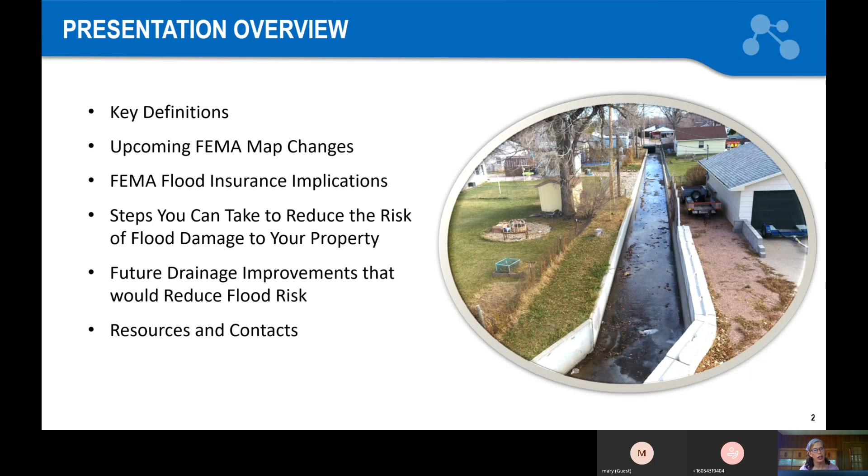I will also go through steps that you can take to reduce the risk of flood damage to your property, regardless of the FEMA map changes and what the status of that is. And then look at, on a city-led process, future drainage improvements that would reduce flood risk throughout this basin. And then finally going through resources and contacts for questions.

So on the key definitions, you've probably heard either in the media or from neighbors, something referred to as the 100-year event or the 500-year event. And sometimes you've heard that, hey, we've gotten three 100-year events in the last 20 years, or we haven't had an event like that in my memory. And when we say something like the 100-year event, what we really mean is it has a 1% chance of happening in any given year.

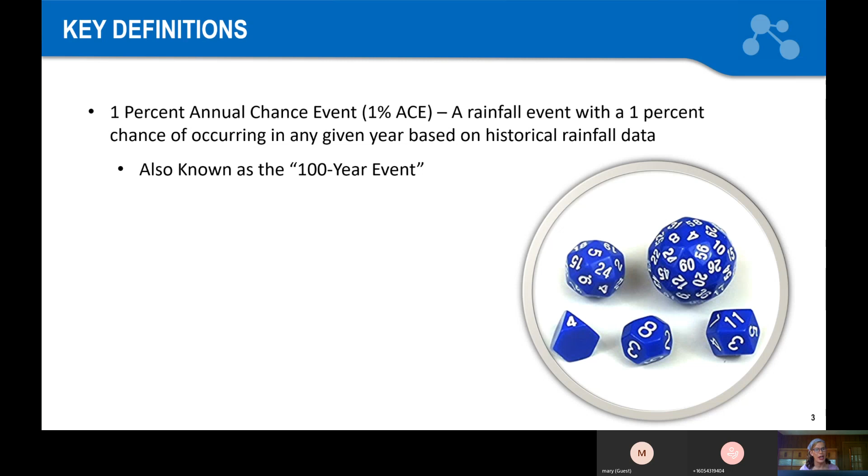The way to think about that is if you think about a large die, and if it had 100 sides on it, and one of those sides was the 100-year event, and once a year you rolled that die, that 100-year event, when it got rolled, would be kind of the way that the statistics work on that. And so you can think about rolling that die maybe 200 times, and you might not get that at all, or you might roll it 3 times in 20 tries. And so that's the background on why sometimes we don't have an event like this for a very, very long time, or we might see that event more frequently than what we might expect.

Getting to a more severe event, we have also what we call the 500-year event, and that is the 0.2% chance of happening. So you take that 100-sided die, you make it a 500-sided die, and put the 500-year event on just one of those sides. And again, the likelihood that you'll get that in any given roll or year is even less, but it can happen. And if you roll it, let's say 50 times, which would represent 50 years, there's a decent chance that you might pull up a 500-year event in a 50-year time frame. So that's what we mean when we talk about the 100-year event, the 500-year event.

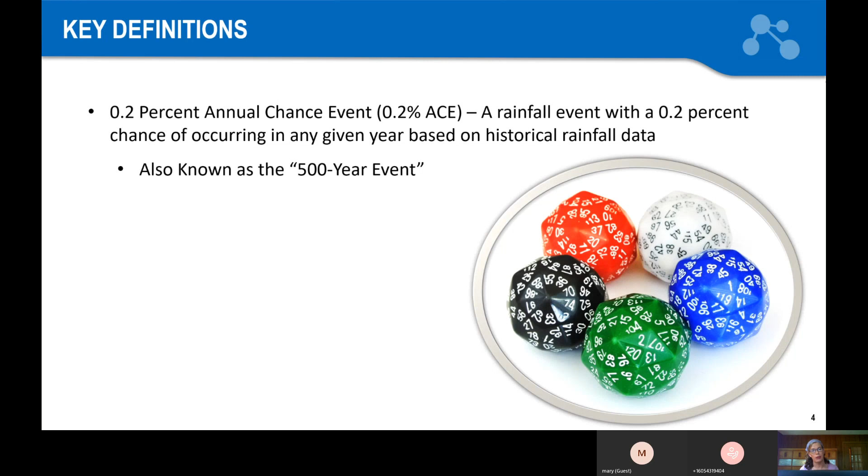In this presentation, I'll also talk about the 10-year, which you take that 100-sided die and put it down to 10 sides. That would represent a 10-year event, and a 50-year event would be a 50-sided die with the 50-year event on that. So when I talk about that, just again, think about the likelihood and the familiarity that you might have with rolling a die, and that you might have a lot of events happening in one try, or you might not get that number in a lot of different tries.

Next definition that I'll talk about is a flood insurance rate map, or FIRM as an abbreviation. And what that is, it's an official map that FEMA issues, and it shows different flood zones. So this darker gray in this particular map is the 100-year event, or that 1% annual chance. And this lighter gray is the 500-year event, or the 0.2% annual chance.

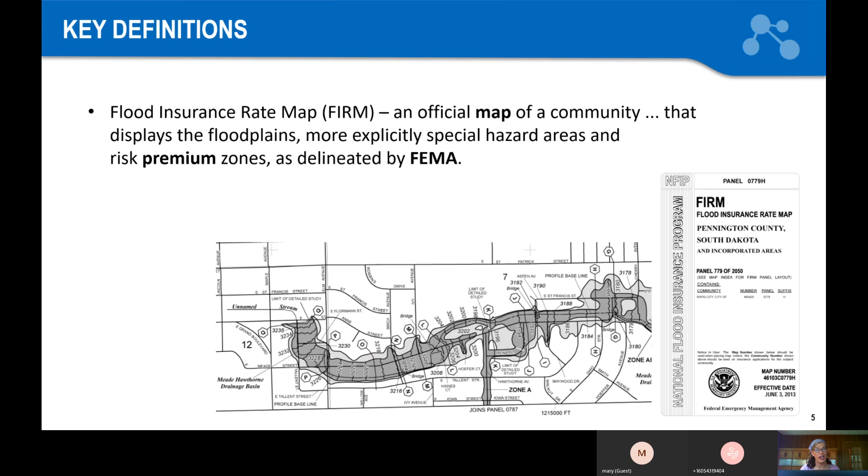And again, it's a map that's issued by FEMA, and then the City of Rapid City administers essentially flood zoning based on that map. New maps are issued every 10, 15, 20 years. So it's not something they do every year. It's not something they do every couple of years. It's an infrequent process that FEMA goes through, because it's a lot of effort to update an entire map.

But recognizing that things change from the time that a map is issued, FEMA also has an official process which they call letter of map change. And those are essentially general terms to refer to both what's called a letter of map amendment, which I'll talk about specifically, and a letter of map revision. Those change how FEMA views your property and your structure in two different ways.

So the first is a letter of map amendment, and what that does is it doesn't do anything about changing the basis for how FEMA determines what a flood elevation is. What it says is there was specific survey information that was done on the structure on the property, and it said that structure was in reality a little bit higher or a little bit lower than the flood elevation at that location. And that structure, even if the map says that that structure is in, this document would say that FEMA is going to treat that structure as out. It doesn't do, again, anything with the basis of that flood elevation, just how that structure relates to that flood elevation and how it was determined.

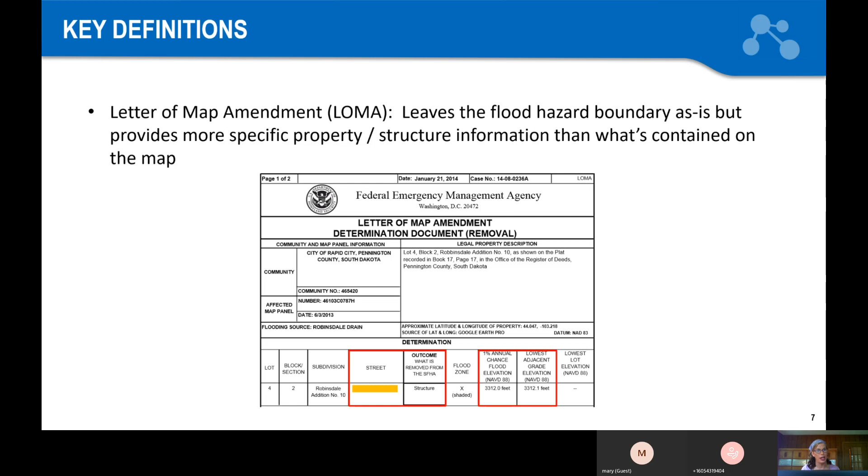But this process, again, changes the boundary, changes how much water FEMA thinks is going down a particular river or creek or drainage. And it again changes that flood elevation. So that's that process. And that'll become relevant as I talk about this project that we did with Rapid City.

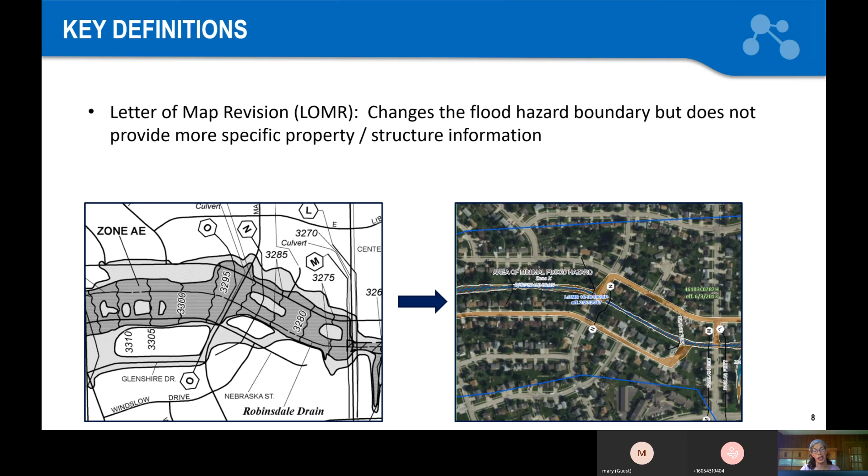If I go to this previous slide here, this map that's on the right is from that National Flood Hazard Layer. So it's a lot easier to figure out what that floodplain boundary is relative to your property, as opposed to looking at this map that's on the left, where it's really hard to figure out where your property is, where your structure is, and how it affects you personally. So this is a great resource if you're interested in how the floodplain affects your property.

On a local level, on Rapid City's level, nothing to do with FEMA. Rapid City, over the past 30-some years, has created what they call Drainage Basin Design Plans, or DBDP for short. And again, it's a city-led process. A report is what comes out of it, and it essentially recommends drainage improvements to reduce flooding risk to homes, businesses, and city infrastructure. And sometimes those recommendations take a long time to get constructed, because it's best to do those types of projects when you're doing a separate city street project or other utility project. And there's a drainage basin design plan for the Meade-Hawthorne drainage basin as well.

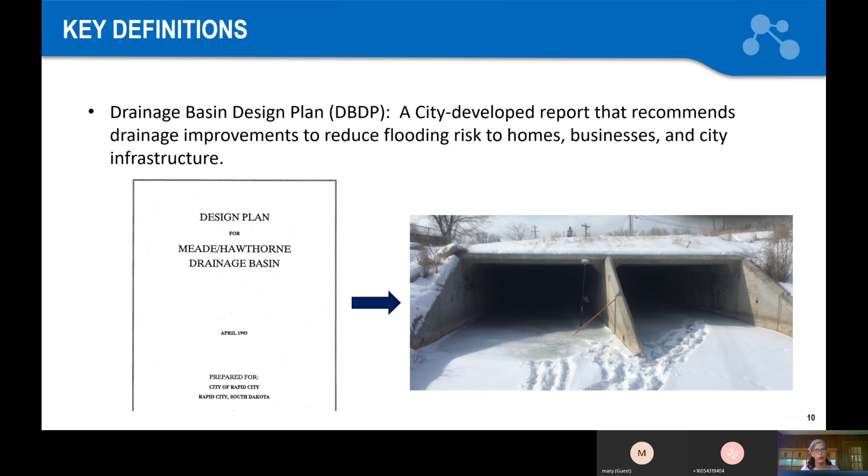Where that becomes relevant is the picture that's on the right is a double box storm sewer that was built under Meade Street. That is one of the drivers for why we went through this FEMA map change process. And so that FIRM panel, that flood insurance rate map panel that I was talking about earlier, the last one that was issued for Rapid City was done in 2013, so 7 years ago. And even though that box storm sewer existed when FEMA went through this mapping process, FEMA didn't account for all the water that can fit through that box storm sewer underneath Meade Street. They assumed all the flow, all that 100-year water needed to flow along the surface.

And if you say that it has to flow along the surface, intuitively, that's going to create more flooding, and FEMA is going to show that it affects more properties than what it does in reality. So FEMA's map is overly conservative with respect to saying what the flood risk is, particularly through this Meade Street corridor. And for orientation, I'll just highlight. So this is Elm Avenue, the north-south street, and Meade Street is the east-west street.

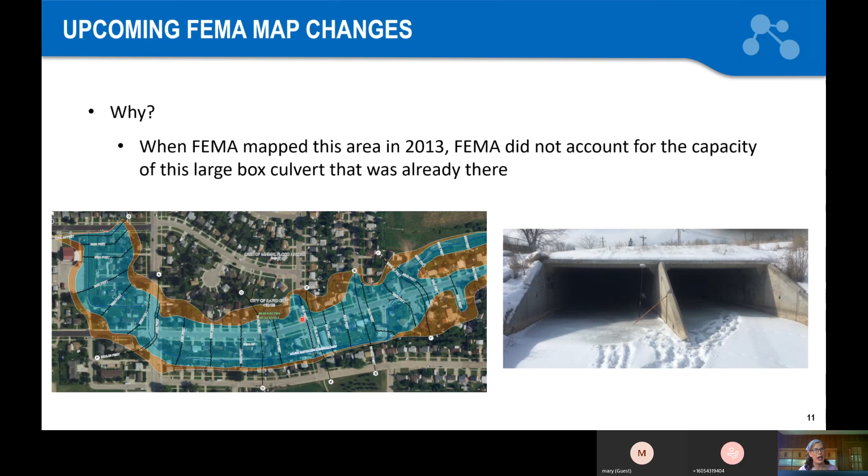Kind of to locate yourself on this map. FEMA has approved the change that we've done, but FEMA will typically wait several months between their final approval and when it becomes effective, to give people a chance to appeal it or provide additional information if somehow that wasn't accounted for. But typically, the process moves smoothly, and on October 19, the map will officially change.

I'm going to switch over from the presentation here to show a comparison of what the floodplain map is now to what it will be when we're finished with the project. So this is just a different view of the floodplain map as it exists today.

Again, the blue is the 100-year floodplain as FEMA's delineated it, and the orange is that 500-year floodplain. The focus of our revision area was between these red boundaries here. On the downstream or east end, this is the boundary of our mapping change, and on the upstream end, it's along St. Anne Street. This is essentially the upper end of where FEMA has mapped the floodplain. That's not to say there isn't risk upstream of that, and that'll come into play when I talk about the drainage basin design plan later in the presentation.

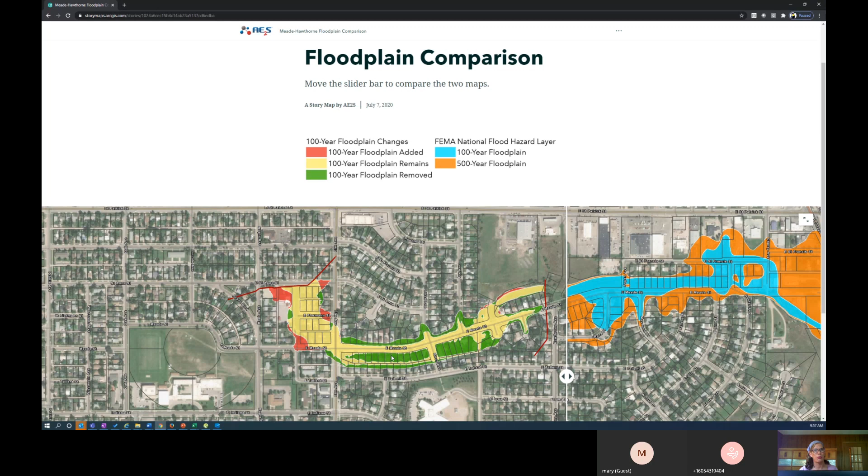So now I'm going to switch back to the presentation here.

So what are the flood insurance implications of this change? The first thing I really want to highlight is that, even though FEMA's approved it already, the effective date isn't until October 19 of 2020. So the insurance requirements, if you have them, are not going to change until that date, even though we know this change is coming.

For example, since most of this area is in the 100-year floodplain now and will be removed, how does that change your requirements from a benefit standpoint? If you're outside of that FEMA 100-year floodplain, it's not required, but it's encouraged. I'll talk a little bit more about that in a bit. Again, if you're outside the 1% annual chance or the 100-year floodplain, it's not required, but it's encouraged.

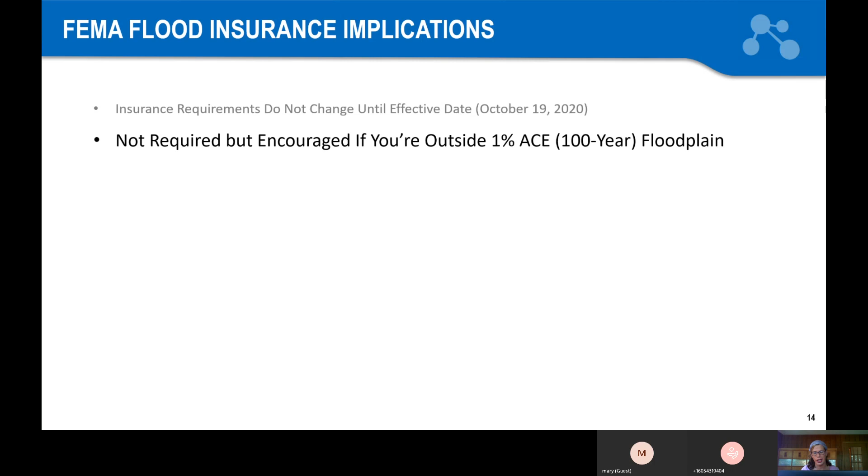Here are some recommended steps that you should take in the upcoming months to see how these changes might affect you and what you need to do to make sure that you're protected and paying an appropriate flood insurance rate. The first thing is contact your lender or insurance agent about how this change affects your policy. Even though this whole program is through the National Flood Insurance Program administered by FEMA, the actual implementation is on the private level with insurance agents and lenders. So that's the process. Those are the people you really want to talk to, to let them know that there's been this change and how it affects you.

Because this is implemented on a private business standpoint, lenders can require certain things. There are FEMA minimum standards for the information they have to have, but different businesses will require different levels of information. So ask what information they will require to make any insurance changes, because it does vary between lenders.

Ask your lender if you're paying flood insurance at a particular rate and your rate goes down, ask if you might be eligible for a partial refund. There's no guarantee for that, but because it's implemented on a private level, some lenders and some insurance agents may provide a partial refund, since we know that map is going to change, but it's going to take several months for that to become actually effective.

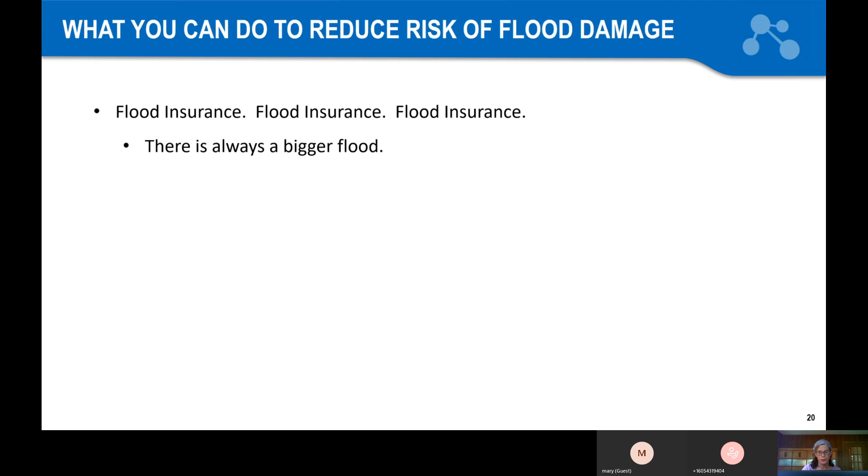In terms of improvements that can be made interior to your house or around your house, there are ways to prevent sewer backups. Even though flood water goes into different pipes and doesn't go into the same sewer that your toilet water or washing machine water go into, when the ground is wet, water inevitably can leak into the sanitary sewer. It's just the way it is.

That can cause the sewer to back up and flood out people's basements sometimes. That's one of the reasons I'm a floodplain engineer: the house I grew up in, this happened a lot, and I spent many nights bailing out my basement. That's one of the reasons that really got my attention, that this can happen, and it does happen.

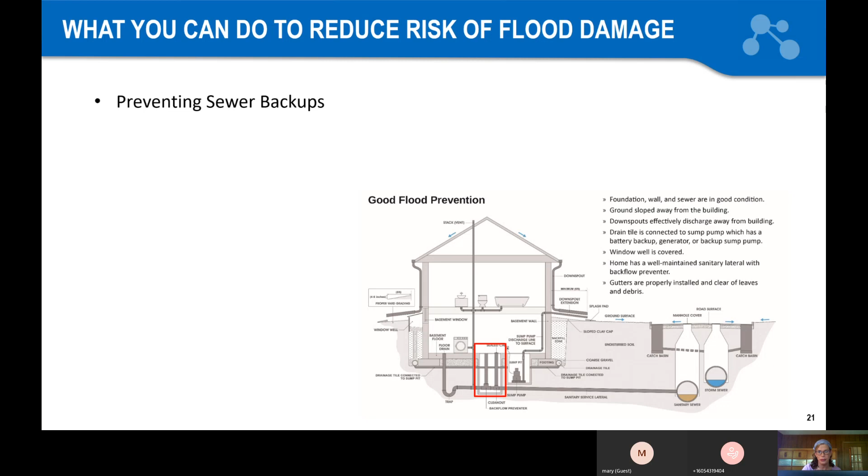Another thing is installing sump pumps. This is fairly common, especially in newer homes, but they can be retrofitted as well. It's a great thing if you get some water in your basement, to be able to pump that water out in a short amount of time.

Another thing you can do is improve the lot drainage around your house. Get the ground built up so it slopes away from the house, so that if you get water from your downspouts, or just roof drainage and water coming along your property, getting that ground to slope away from the house can prevent water from coming into it. It's a valuable, low cost improvement that can be done in a lot of places.

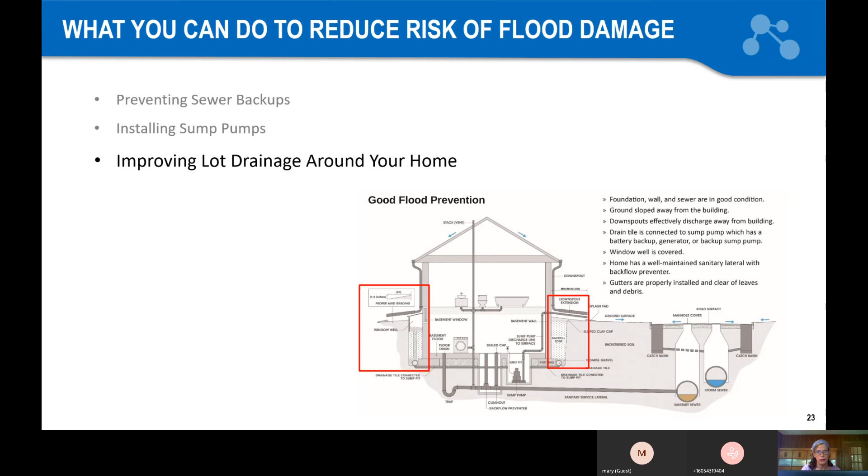On a bigger scale, there are things you can do to elevate homes. You can basically jack up a home off its current foundation, extend the current foundation, or pour a brand new one to get that structure elevated above the ground adjacent to it. We've seen this done in a number of places when flood risk is particularly high. You would still have water around the structure during a flood, it doesn't really change the grades around it, but what it would do is prevent that water from getting into the structure. So it can be a valuable improvement if a particular structure floods frequently, or if you have an investment you want to protect.

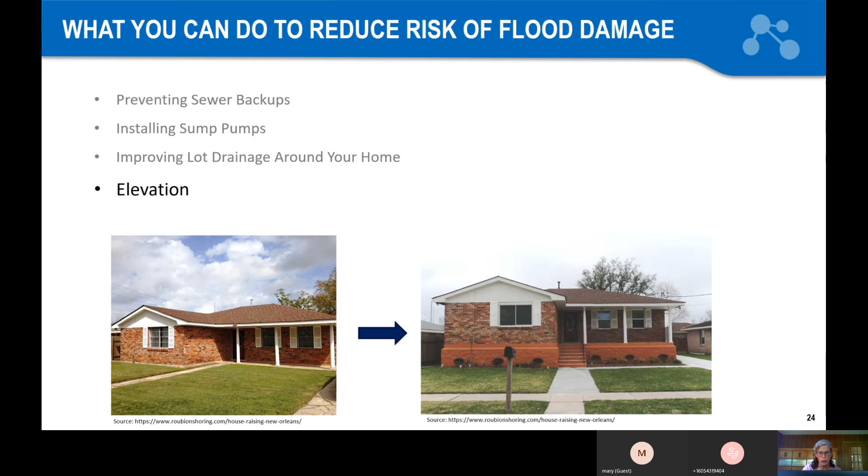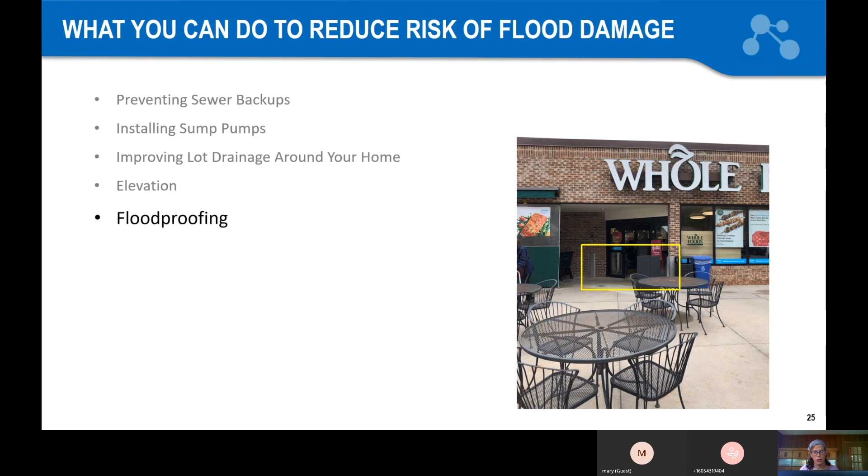Now I'm going to switch to that more local, Rapid City-led process, which is the drainage basin design plan. How is it the same, and how is it different than FEMA's process for mapping or showing flood risk? The city's drainage basin design plans are much more about a comprehensive flood risk evaluation throughout the drainage basin and developing improvements for that. Whereas FEMA only shows what's out there right now, they don't do anything with what we can do to improve that, and they really only focus on these larger drainages. They're administering a program on a national level, so they can't look at, say, a street flooding because a storm sewer inlet didn't have capacity. That's not FEMA's purview or focus, whereas the city's focus extends beyond administering FEMA floodplains. That's how drainage basin design plans fit into this overall understanding of flood risk.

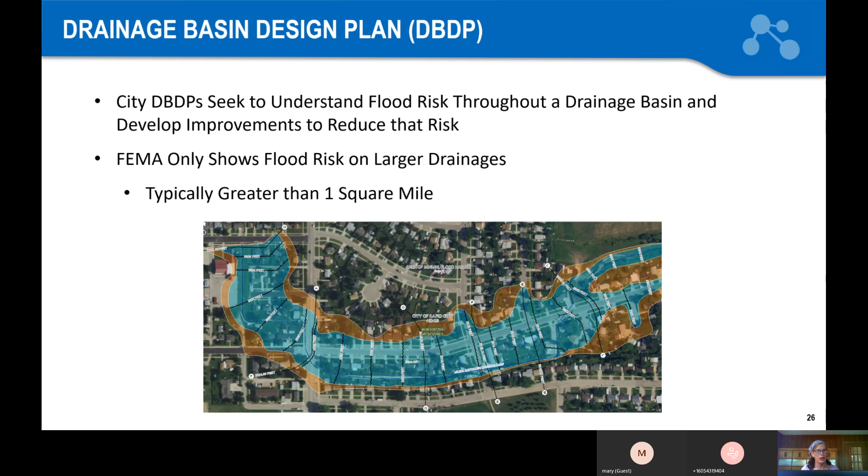The goal is not to eliminate any flooding risk. The goal of a drainage basin design plan is to reduce flooding to an acceptable standard. For example, a standard would be structures being protected, or not flooding, in the 100-year event. The city evaluates flood risk in a much more comprehensive manner than FEMA and uses different standards for doing that, so those maps can be a little different. The goal is that the city has a better understanding, potentially, than FEMA does of what that flood risk is.

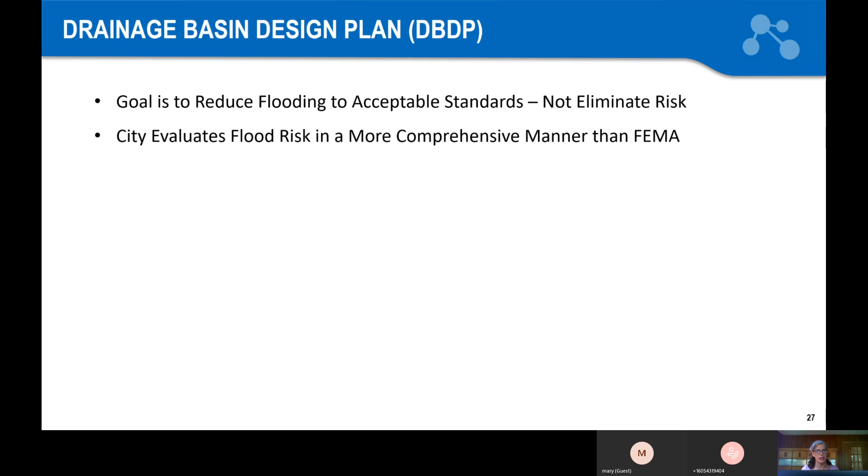In the next few slides, I'm going to show a comparison of the 10-year, think of a 10-sided die, the 50-year, and the 100-year flood risk, and how that potentially affects residences and businesses throughout the Meade-Hawthorne drainage basin.

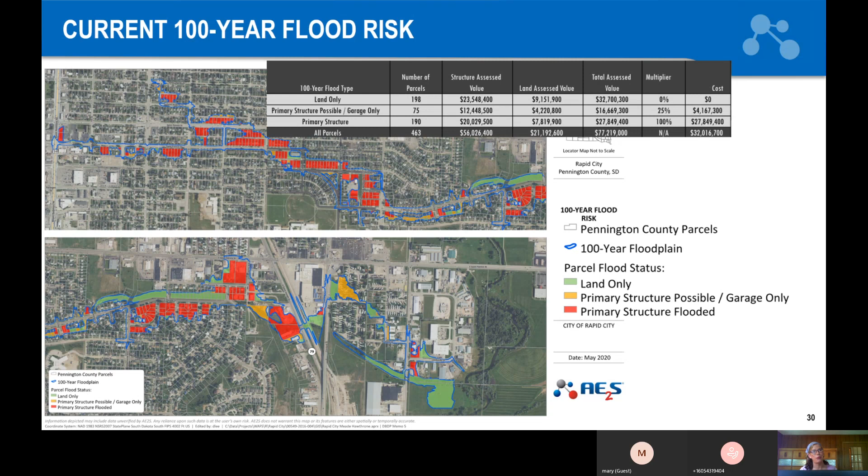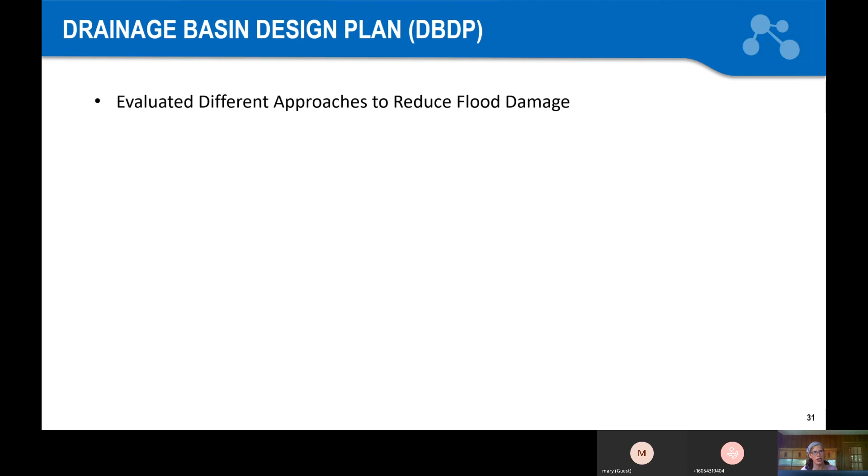That really informs how we think about improvements and what might be a valuable improvement. So we looked at different approaches to reduce that flood damage. There's a lot of different ways a project like this can be done. We really want to emphasize that the options we looked at are only options—they're only viable if they're funded, or if the city or its residents say yes, this is something we really want to do. At this point, they are options that we've presented.

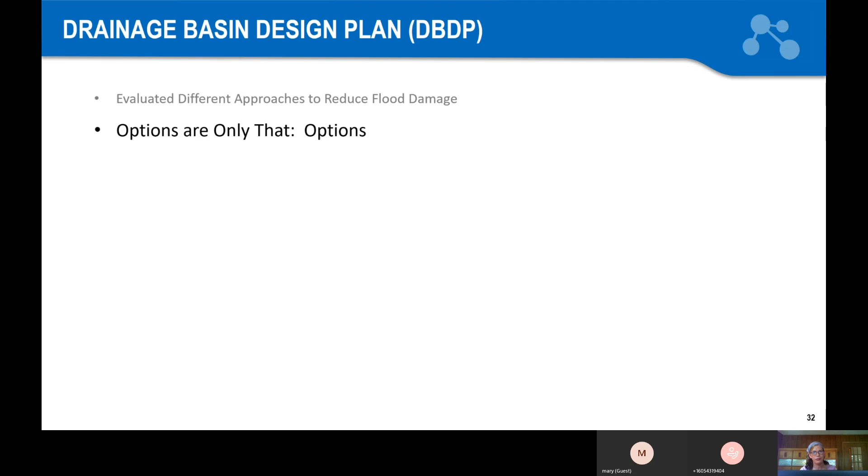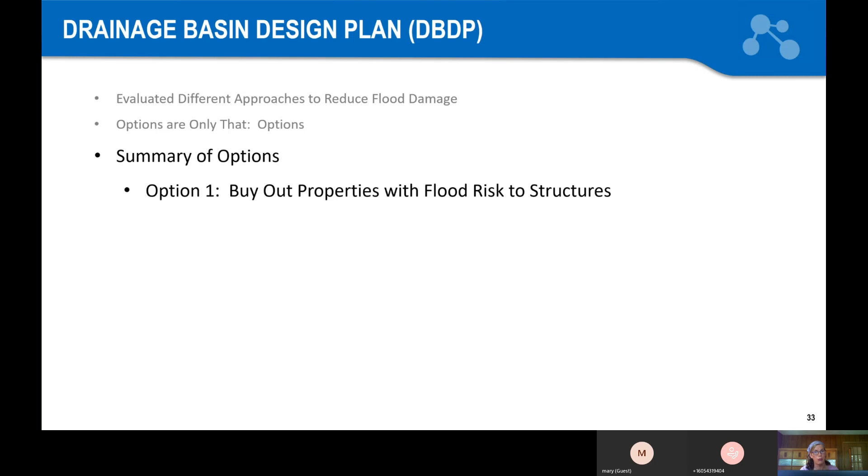But from a community standpoint, there are a lot of drawbacks that potentially come into play. If we bought out all the structures that have flood risk, the benefit is it really eliminates the risk—the house or business is gone, it's green space, so it might still flood, but the damage has been eliminated. The significant drawback is cost. This table shows that if we bought out the structures affected by the 10-year flood, we're looking at something north of 11 million, all the way up to the 100-year event, where you'd be looking at over $32 million.

The other thing is social impact. Housing availability is a challenge in Rapid City—that's a testament to your community. But if you essentially eliminate, let's say, 50 or 100 homes, that really comes down to eliminating equity and affordable housing within Rapid City. For those reasons, this option wasn't considered further as an option in and of itself. It was more evaluated and presented as an option to compare to other different options.

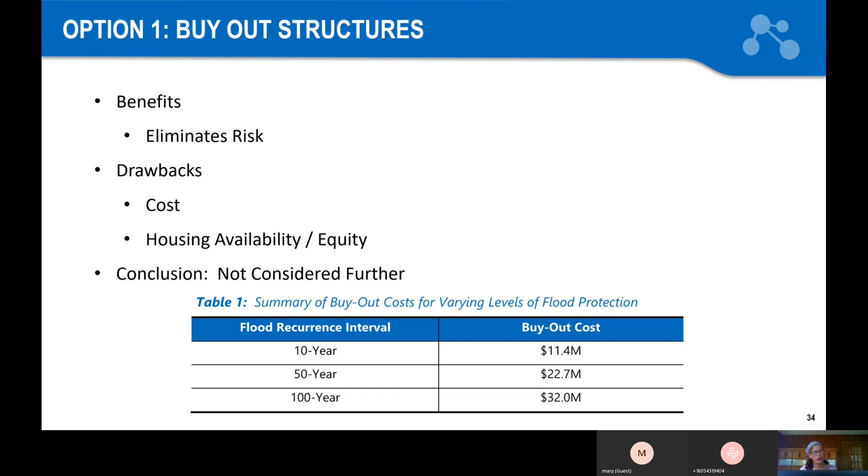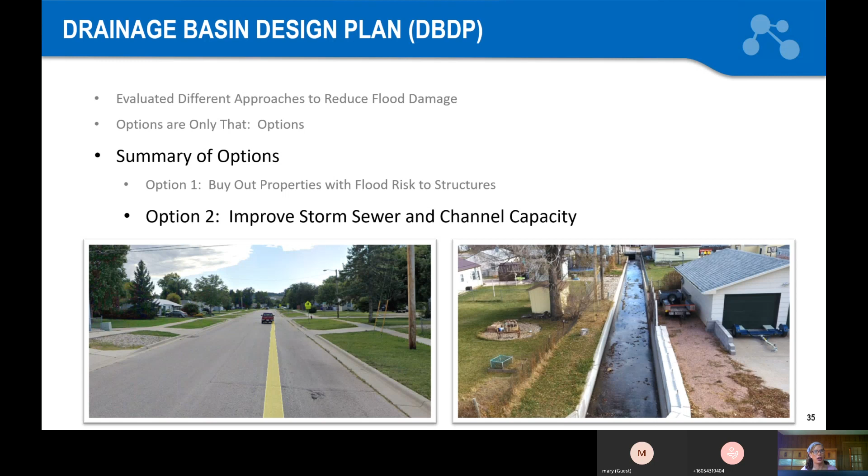So the next series of slides that I'm going to go through walks through those different option 2 and option 3 improvements that we looked at, at various locations throughout the watershed, to reduce that 100-year flood risk.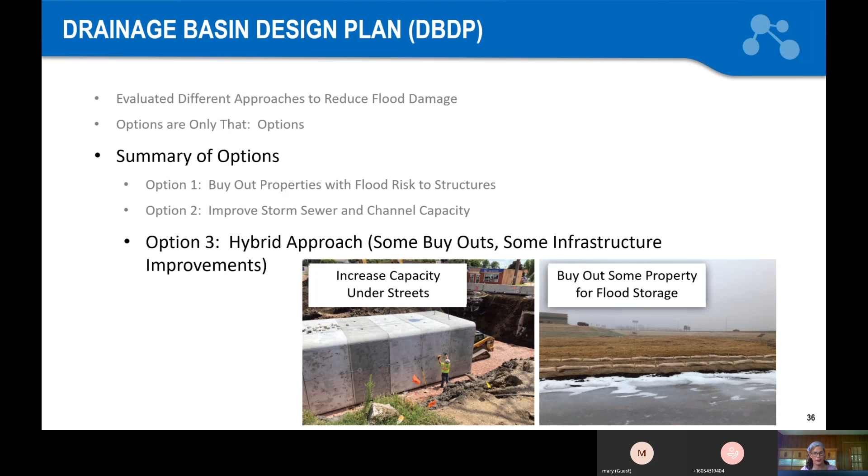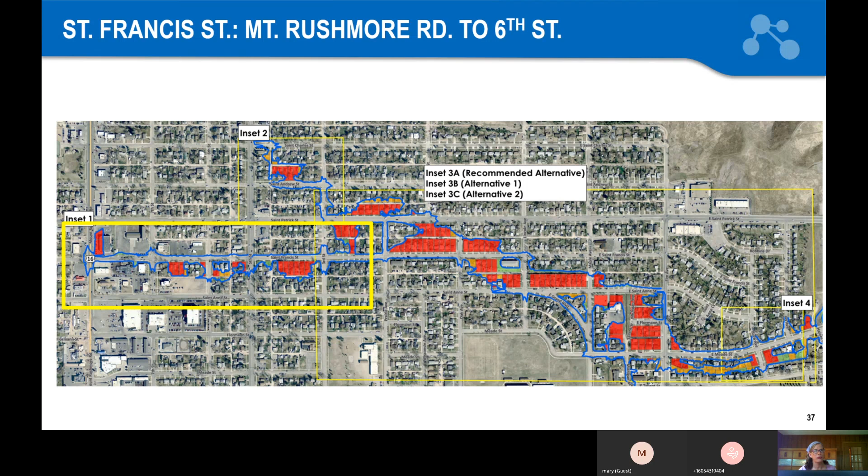So this is just an overview map. The base map is that 100-year flood risk that I was showing a few slides back. And the first one we're going to look at is improvements along St. Francis Street, kind of going east from Mount Rushmore Road. That's kind of the thicker yellow outline that I've noted here.

And what those improvements would look like is it's 3 different improvements. The first is constructing a, let me turn my highlighter, constructing a short flood wall along Mount Rushmore Road and then turning along St. Francis Street to prevent water from the intersection of Mount Rushmore Road flowing into the low area that's next to the Walgreens to the north of St. Francis.

The second improvement in this kind of area would be lowering St. Francis Street for a section going east from Mount Rushmore Road. And the reason for that is that this building right here sits lower than the street, and that's usually a recipe for flood damage because water can easily leave the street, flow through the parking lot and into the building. So if we lower that, water will keep going down St. Francis Street.

The third improvement, the larger one of this particular option, is focused a little bit further east, and it would essentially create flood storage, a detention basin, generally what we've schematically shown in this outline here. The shape, the location, the exact location, this is all conceptual. It's not saying that this is exactly the plan. But what's really important is this volume and generally where it's at.

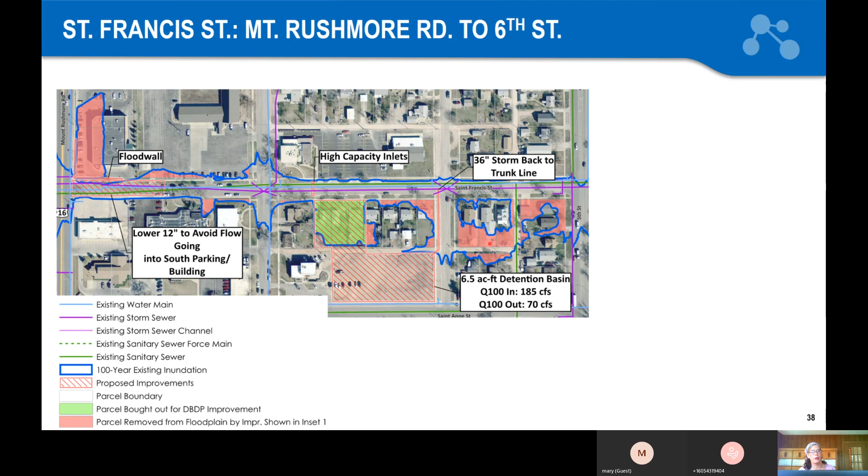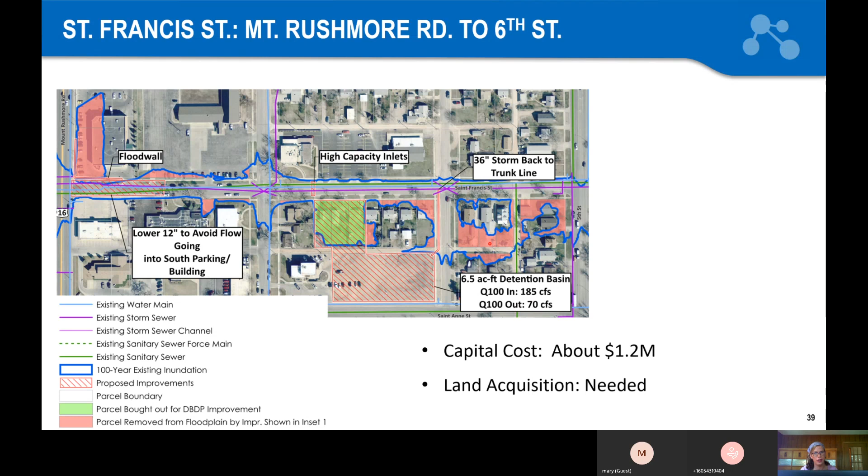In terms of what these improvements would cost, the combined cost of these would be about 1.2 million, but those costs do not include any land acquisition that would be needed, which would certainly be needed in this particular location to provide that storage that we've accounted for. So that's a summary of improvements from Mount Rushmore Road to 6th Street along St. Francis Street.

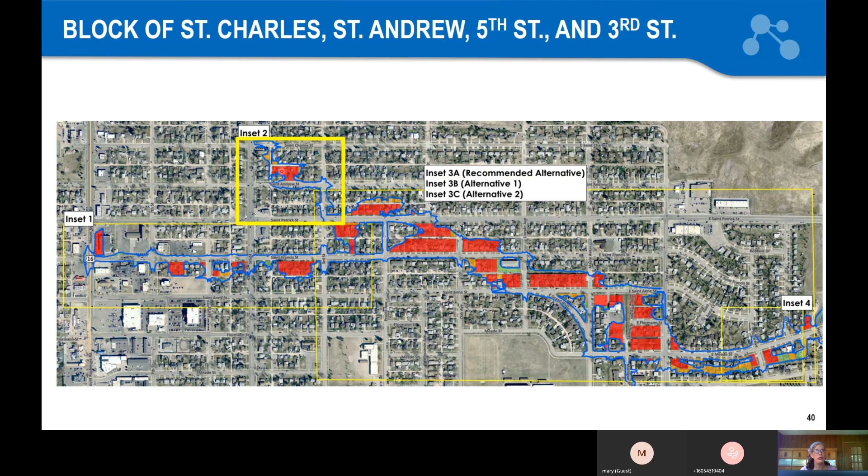The next area of improvement that we looked at was to the north, in the St. Andrew, St. Charles Street area between 5th and 3rd Street. Again, the thicker yellow outline is that area. And first of all, there's flood risk in this low area where the houses are, particularly on the south end of that alley. Flow comes through here and wants to run through the properties into St. Andrew Street.

So what we looked at there was constructing some high capacity inlets. Remember how I talked about if we increase storm sewer capacity, we have to get the water into it as well. And then constructing a 60-inch storm sewer going east on St. Charles to 3rd and then turning south on 3rd to St. Andrew to tie in with the existing storm sewer. You can see that the downstream pipe is an existing 48-inch and we would be constructing a 60-inch.

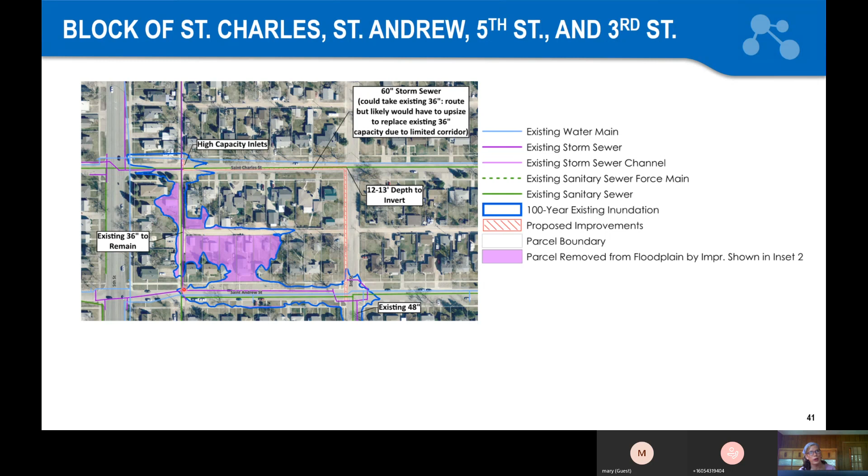We wouldn't be overwhelming that existing 48 because that 48 is steeper pipe, and so it has more capacity than the 60-inch, which has to be pretty flat in this area. So that's the reason for the pipe size change. And we would keep the existing 36-inch pipe that runs down the alley between St. Charles and St. Andrews, because we want to take advantage of the improvements that have already been made. We don't want to abandon those if we can avoid it. From a cost standpoint, this cost would be about $825,000.

Since we'd have to rip up parts of the street, we'd certainly have to restore it. And storm sewer, when we start looking at a 60-inch size, is expensive. But one of the advantages of this approach is that land acquisition is not needed at all for this particular improvement.

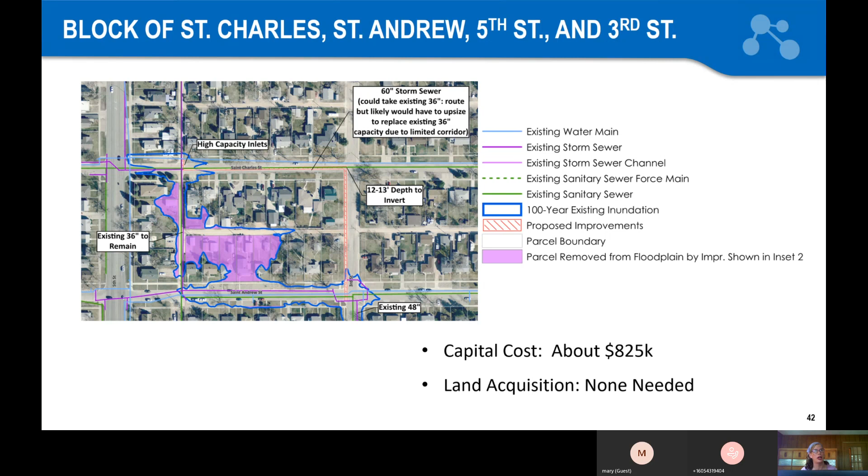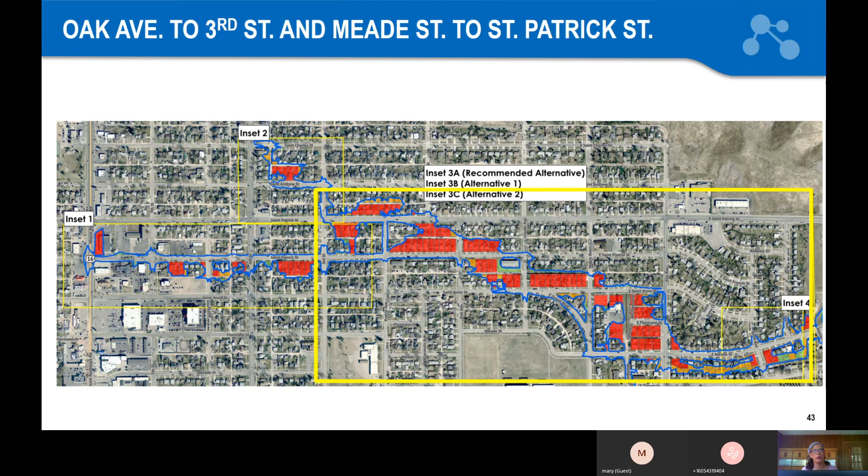The third area that we looked at, and this is one of the bigger footprints of the improvements that we looked at, is moving to the east of 3rd Street and going towards Oak Avenue, which is on the right-hand side. Since this is one of the major corridors of flood risk through the Meade-Hawthorne Basin, there are several different ways that it can be reduced. We looked at 3 different alternatives for this option.

The first is, there's a lot going on again in this map. So the first improvement is looking at St. Patrick Street, and it would be lowering St. Patrick Street, going east from 3rd Street all the way to 1st Street.

And the reason for lowering St. Patrick Street is because the street elevation is very close to the existing homes that are on the north and south side of the street. So it doesn't take much flooding in St. Patrick Street to start affecting homes and properties. By lowering it, water can more efficiently move along the street corridor versus flooding properties that are adjacent to it.

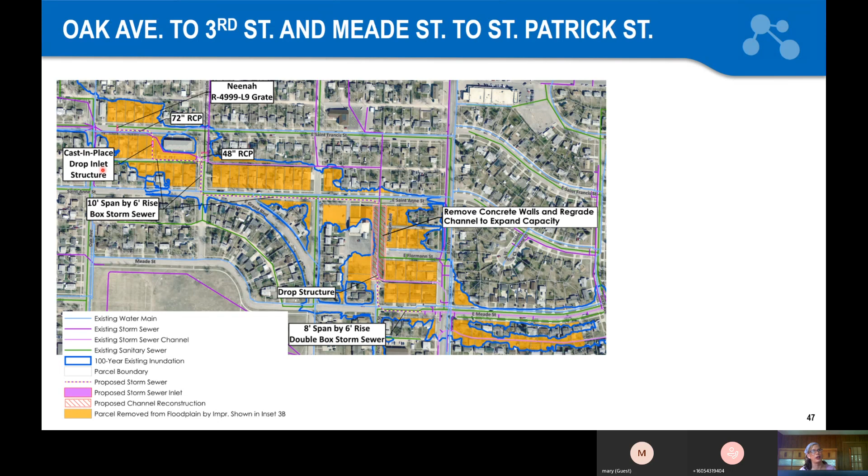The capital cost for this improvement is about 4.7 million, so compared to 7 million in the previous version of this area. And the other aspect of this that's, again, important to note is that land acquisition would still be needed, but it's quite minor. I believe it's like one parcel that would have an impact that's outside of the city right-of-way.

This alternative, compared to that first alternative, again, significantly less land acquisition. It's less costly than the previous alternative. The biggest downside is that this one does not reduce downstream flows. This merely moves it through this corridor more efficiently. And so you're still seeing that same or slightly increased flows going downstream.

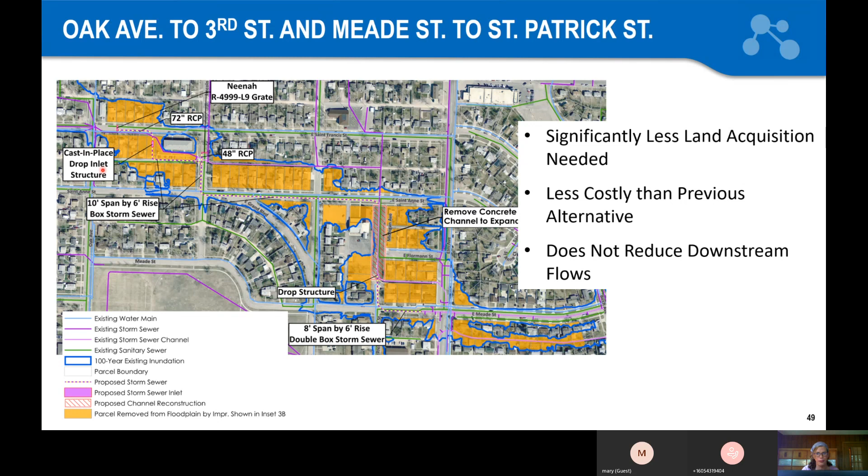The final alternative that we looked at for this corridor was an alternative that was presented by a previous consultant a number of years ago, and it's just a similar variation of the previous option. So again, here's Meade Street. It would be taking a 14 by 6 box storm sewer running to the west, or it would be flowing to the east, going along Grand Boulevard to Lincoln, going north on Lincoln, and then turning to the west on St. Francis Street, and box storm sewer of varying size.

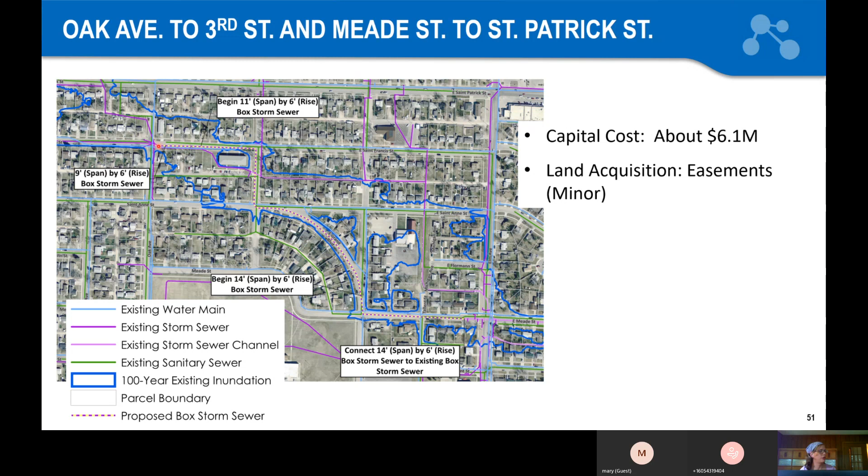And the cost of this is higher than the previous option that we presented. It's 6.1 million. The land acquisition would be also minor, primarily consisting of easements. And so from a comparison to the other alternatives, it's the least land acquisition from the previous alternatives, but it's, I would say, very similar to the second alternative. However, it's $1.5 million more expensive than that second option that we presented. And similar to that, it also does not reduce downstream flows.

The other big drawback to this alternative is you can see that there aren't any parcels that are shaded that show removal here. And the reason why on this particular alternative is this alternative didn't really look at how do we get the water into that box storm sewer as a project in and of itself. There would be substantial additional improvements beyond this particular project in order for this system to function as it's intended, as it was designed or conceptually evaluated a number of years ago. So that would be probably one of the bigger drawbacks of this approach versus the other two approaches.

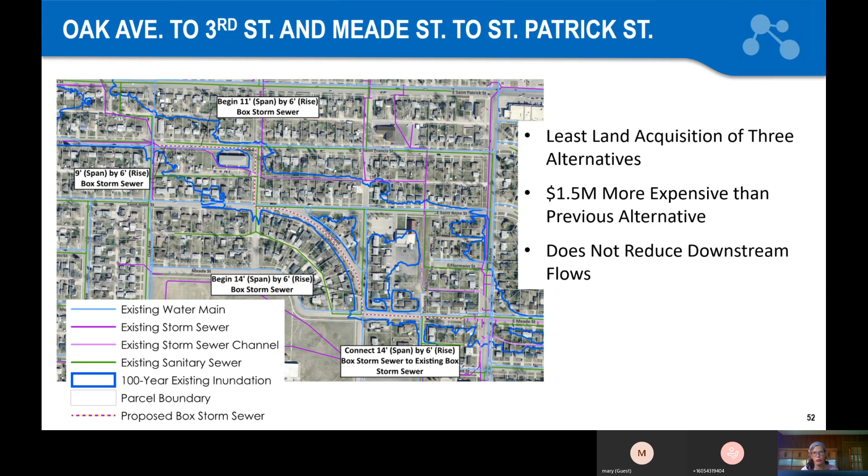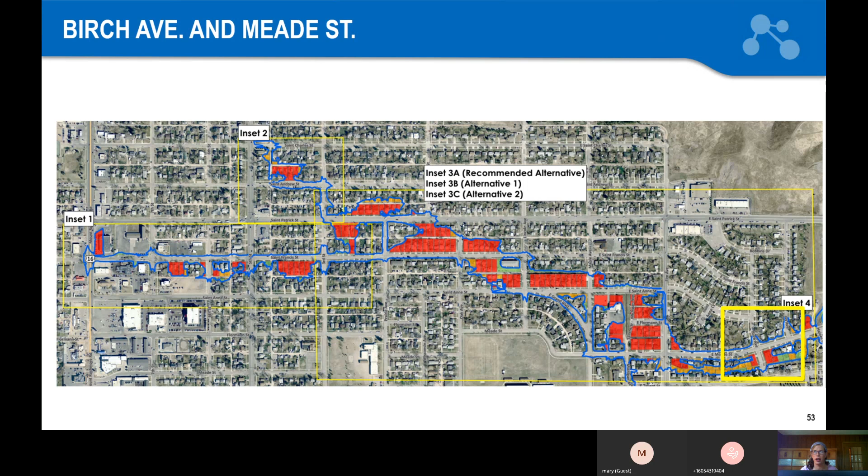Moving on to a little bit further downstream to the intersection of Meade Street and Birch Avenue, and again, that area that's shown in the thick yellow outline. So this project is much smaller in footprint, a much more localized benefit. Again, for orientation, Meade Street, this lighter purple, that's the double box storm sewer that's running under Meade Street. But there's also an existing concrete channel that runs in the back of these properties here.

And this proposed 72-inch connection between those would provide a balance of capacity. Right now there's some excess capacity in the double box storm sewer, and the channel is over capacity. And so this provides an opportunity for that water to get out of that channel and connect up to that box storm sewer, again, getting the flood waters off the surface and into the storm sewer where they don't create damage. I've highlighted in this yellow or light blue-green color the parcels that would be removed from the 100-year floodplain if this improvement were to be constructed.

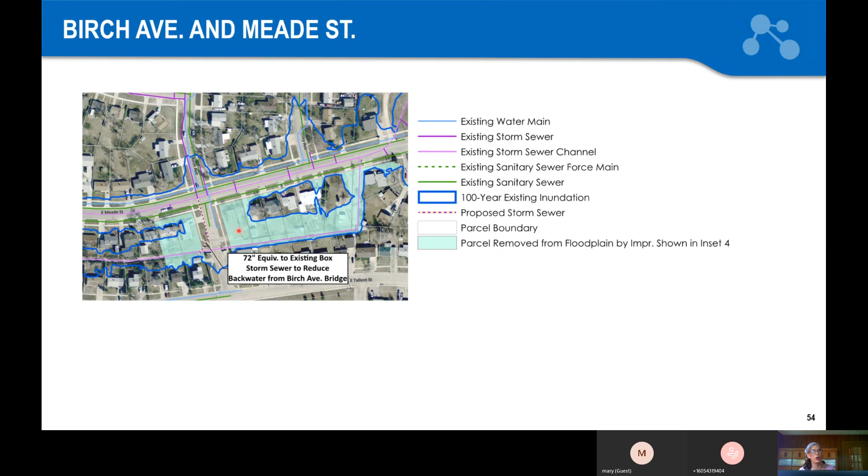Capital cost is about $350,000, and land acquisition would be minor. There'd be one storm sewer easement that would be needed to connect up to that existing concrete channel.

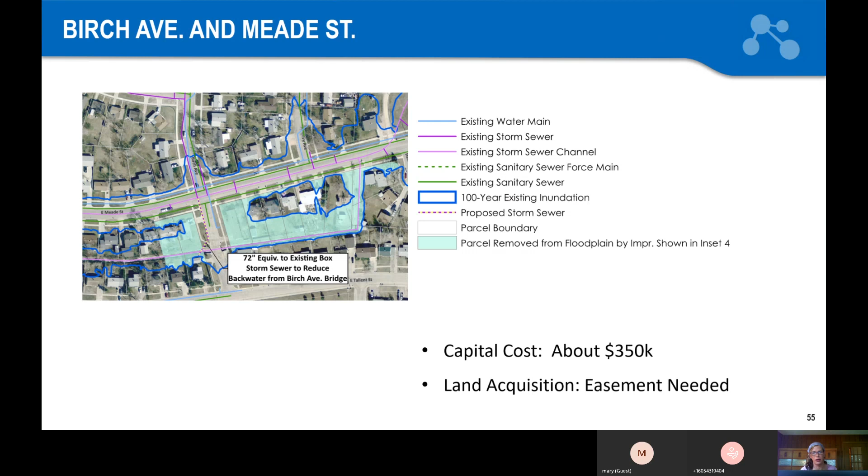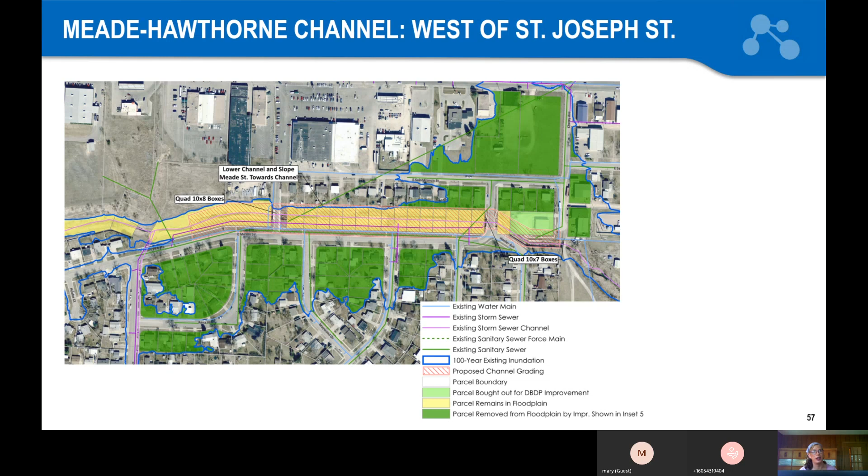If those improvements would be constructed, the parcels shown in green would be removed from the 100-year floodplain based on the drainage basin design plan analysis. These improvements would have a significant benefit in this particular area. The cost would be about $4 million, and there would be some land acquisition needed to expand capacity through this area, affecting this parcel to create that additional capacity.

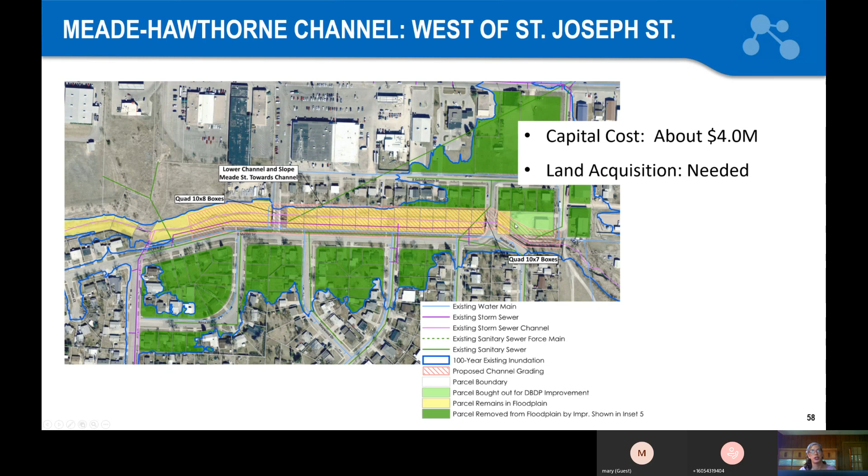Finally, on the east side of St. Joseph Street, the channel itself has capacity where the restrictions are at three different crossings: the crossing on the east end, Campbell Street, and a private or access road that crosses the channel just downstream of St. Joseph and the railroad. Those culverts or bridges would need to be upsized to four 10x10 box culverts or an equivalent bridge. The cost of those would be about $3.5 million. The nice thing about this is that there would be no land acquisition needed, because the improvements necessary are local or specific to those culvert crossings.

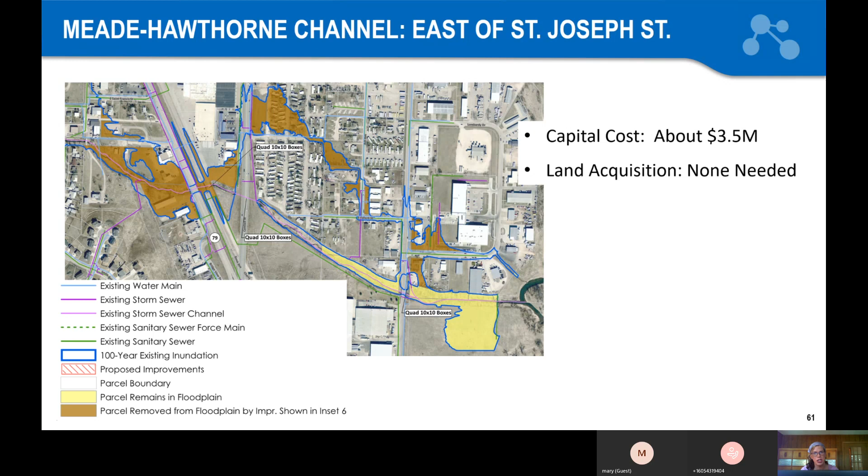So on the drainage basin design plan, I wanted to summarize and provide some key conclusions from the work that we did for the city. Infrastructure improvements can reduce flood risk. The Meade Street box storm sewer that the floodplain map reflects now illustrates that, and the work we did through this drainage basin design plan also illustrates that improvements can reduce flood risk.

The most cost-effective approach might be a combination of buyouts with some infrastructure improvements, but recognizing that any buyout plan would have an impact on housing in the city, and that's a social consideration that needs to be understood prior to pursuing any sort of buyout plan. There's a significant cost to any approach. These aren't cheap improvements that are necessary or that we evaluated. However, the potential flood damage that exists would also be a cost when those floods do occur.

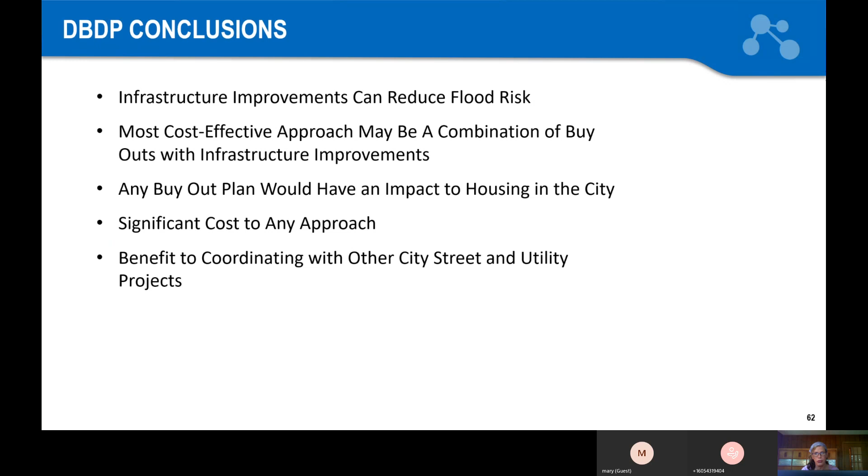There would likely be benefit to coordinating with other city, street, and utility projects. For example, in the cost we presented, if it requires ripping up a street, the cost reflects that street repair and demolition. Whereas if that street is being torn up anyway as part of a separate street project, there's a dual benefit from repairing the street as well as building the storm sewer utility below it. Finally, in this presentation, I'll go through some resources and contacts for questions.